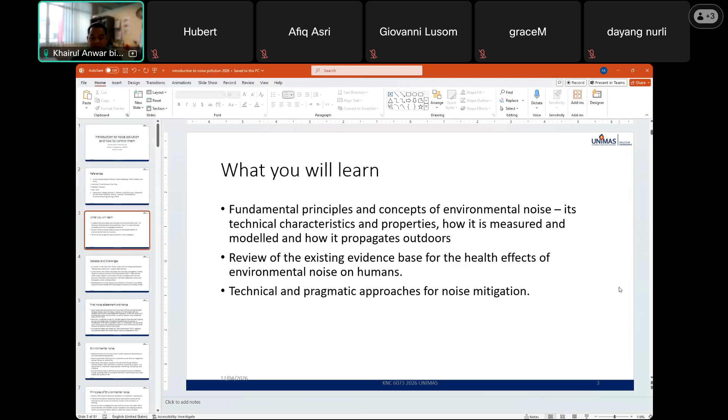So the debate and challenges - this is based on the environmental noise pollution books.

It starts with an article in the New York Times that explains, Behind city's painful din, culprits high and low. The author describes the everyday subjugation of New Yorkers to various sources of environmental noise - we have road traffic noise, then at night construction activities, helicopters, planes, and many more.

So the manifestation of noise exposure as emotion in humans is incredibly subjective, even though the physiological impacts are broadly similar. Later we will see the impact of noise on health.

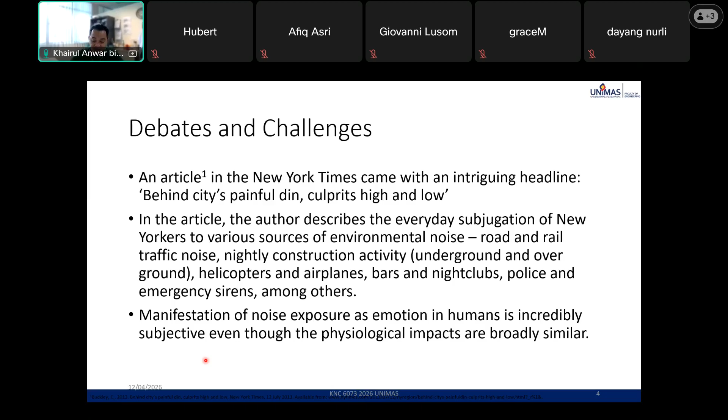Historically, the first noise abatement event carried out was in the streets of Rome during the night, because citizens could not sleep. However, it is the Greeks credited with the first noise abatement ordinance, in the first century before Christ, that banned potters and tinsmiths as well as roosters from residential areas. So this is the first ordinance.

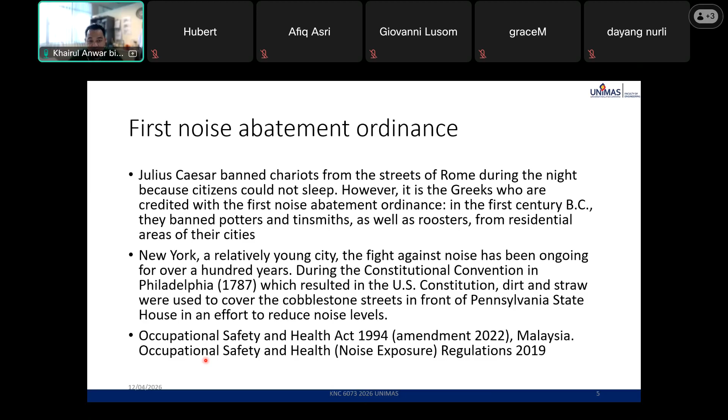Back to New York, a relatively young city - the fight against noise has been ongoing for over 100 years, even during the Constitutional Convention that resulted in the US Constitution, where they put dirt and straw to cover the cobblestone street to reduce the noise level. So in Malaysia, we have the Occupational Safety and Health Act 1994, Amendment 2022, that recently had the Noise Exposure Regulation 2019.

So, environmental noise - the characterization of sound as noise is quite subjective, depending on the individual exposed. Noise is generally referred to as unwanted sound that significantly disrupts human or animal life.

The alternative description is based on physicist George William Kaye's 1931 definition of noise as sound out of place. It is sound that is unwanted, inappropriate, interfering, distracting, and irritating - based on George William's description of noise.

So by definition, environmental noise is a form of pollution, defined as any unwanted sound created by human activities that is considered harmful or detrimental to human health and quality of life. So, principles of environmental noise.

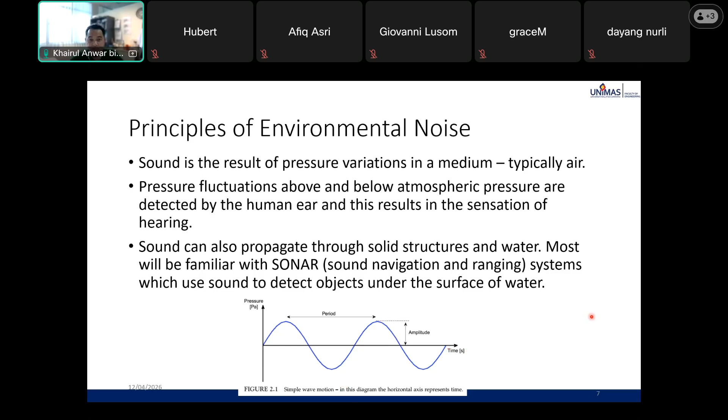So this is the fluctuation of pressure over time, the sound as a wave. So the vertical axis corresponds to the pressure fluctuation, in Pascal, while the horizontal axis represents time. So all sound has three fundamental characteristics: frequency, amplitude, and wavelength. The frequency of a wave, f, is the number of oscillations per second, or cycles per second.

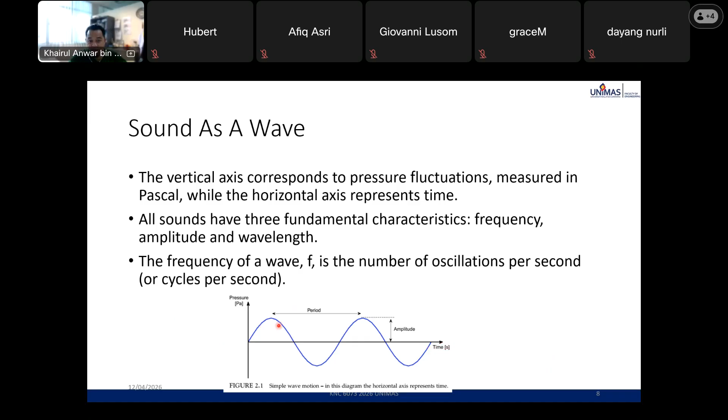Meanwhile, the wavelength lambda is the distance - so you see the difference here, the x-axis now is in distance, length, the distance measured in meters traveled by a wave in one oscillation. So if it's over time, you can calculate the time between the peaks - that's the period. If the x-axis is in distance/length, the distance between the peaks is the wavelength.

For sound waves in air, the speed of sound generally lies around 345 meters per second.

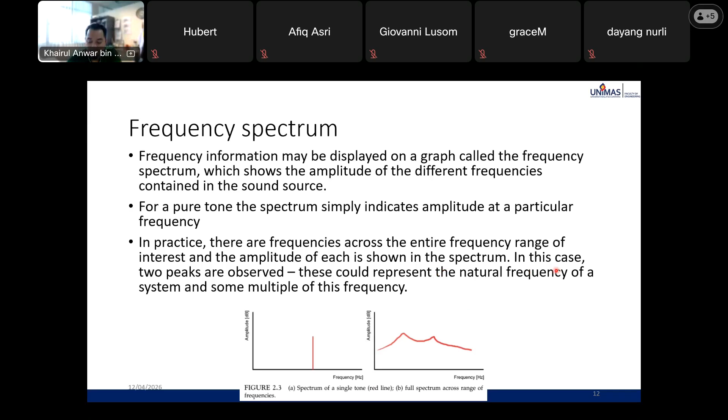So we have octave bands. Certain situations require analysis of the frequency content of noise instead of the overall noise level. This requires information expressed across the frequency range. So octave bands are used to group together different frequencies in a sound, so the frequency information can be analyzed easily. The octave normally has a center frequency.

If you can see here, it's a trend: 63, 125, 250.

So when dealing with octave bands, we identify each by center frequency. So this is the octave band, based on the frequency. Because in frequency, there's a peak, so we choose the center frequency.

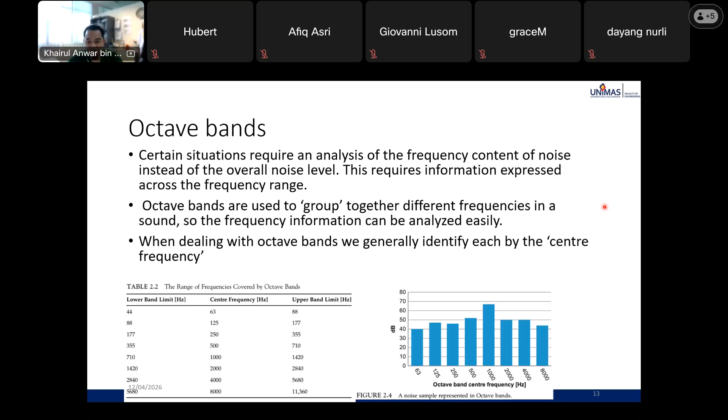Next is the decibel scale. Sound is commonly measured using the decibel scale, or dB. The decibel is a ratio of one pressure to another. It uses a logarithmic scale, and thus reduces a large range of information down into something more manageable.

So LP equal to 10 log P over P naught, squared, in dB. P is the sound pressure being measured, and P naught is the reference sound pressure in micropascals. The reference sound pressure corresponds to the lowest sound pressure that the average person can detect.

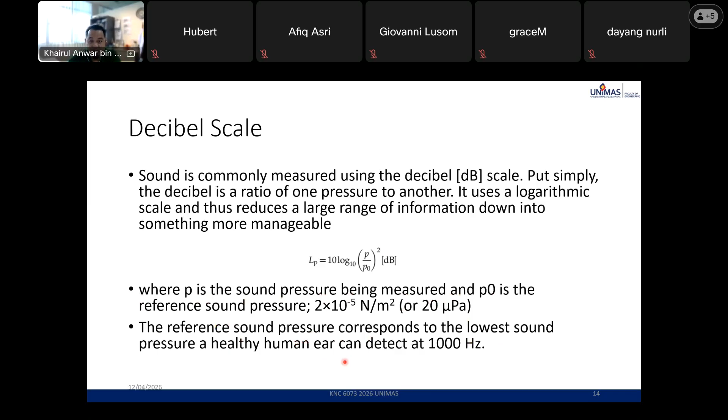So we have a logarithmic scale, because the decibel is a logarithmic scale, it's useful to summarize some movements. Simple, this is just basic, just to show that if it's log10(a) plus log10(b), we can simplify it to equal log10(a multiplied with b). If it's minus, it's log10(a over b). If you raise a logarithm to a power, you can bring the power in front: log10(a) to the power of n equals n multiplied with log10(a).

Just some scale functions. Okay, this is about the sound.

The sound pressure level LP, we have sound pressure level, and sound intensity level LI. The sound pressure level LP is the level of sound expressed in decibels relative to the threshold of hearing.

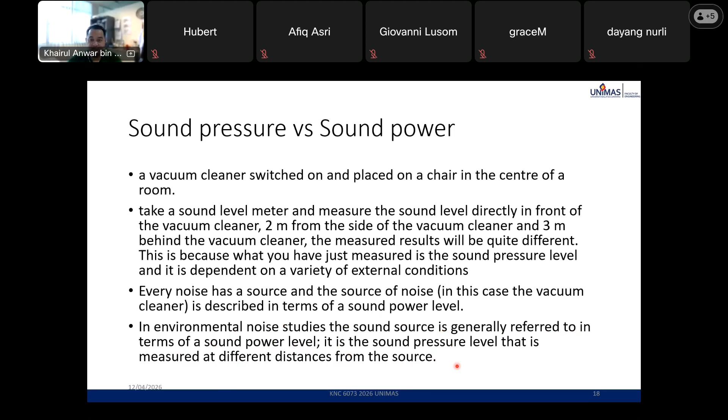Working with decibels, because the decibel is on a logarithmic scale, decibel levels cannot be added or subtracted in the normal arithmetic fashion. Decibels must be added logarithmically. That's why I show you the logarithmic scale.

So two sound levels, L1 and L2, are added together in the following way to get a total sound level: L total equal to 10 log 10 of the bracket 10 to the power of L1 over 10 plus 10 to the power of L2 over 10. This is the example of why we cannot add it normally.

A sound level meter measures the sound level 1 meter away from an idling lawnmower and records the noise level as 60 decibels. Now a second lawnmower with the exact same sound power as the first is turned on beside the sound level meter, again at 1 meter away. What sound level would the meter now record? It is reasonable to assume the sound level meter is subjected to two noise sources, both resulting in 60 decibels at that position. If we were to sum it normally, it should be 120.

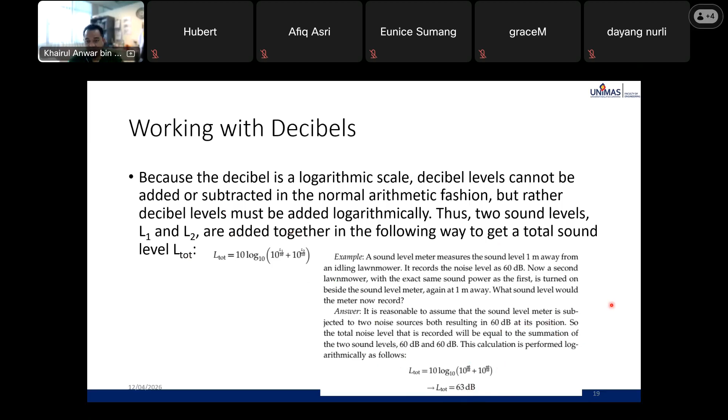But if you follow this logarithmic method, the increase in decibel is around 63. So each lawnmower contributes 60 decibels, but if you add it up properly, it's 63 decibels.

So this is the A weighting, the units. The human ear does not respond equally to sound at different frequencies. We tend to perceive sound at lower frequencies as having a lower intensity.

This is an explanation about the decibel, dB. Normally it should be associated with this A weighting curve because of that first point. So the unit turns to dBA for A weighting, dBC for the C weighting, and dB for no weighting. So dB alone, referred to as dBZ, is no weighting.

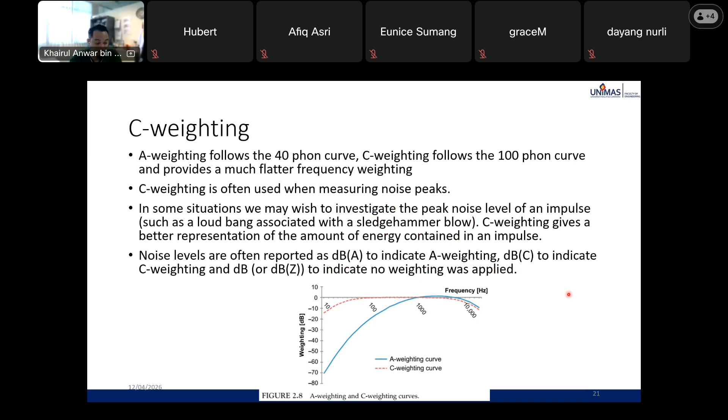Noise levels are often reported as dBA. You also get dBC, the C weighting, or dB where no weighting was applied. This is a noise metric, this is how we quantify noise.

A noise indicator or metric is used to reduce a large volume of information about a noise situation to a single number system. It is designed to make the information easy to handle, but still provide accurate information about the noise environment.

There are three broad categories of time-varying noise. We have continuous noise that is fairly constant over time, such as the operation of an air conditioning unit.

We have intermittent noise, usually at irregular intervals, like intermittent use of a saw in a timber plant or stop-start of a forklift.

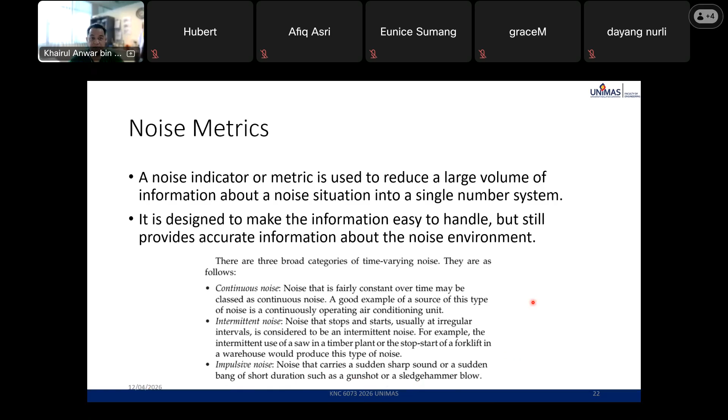Continuous equivalent noise level, this is the first noise metric. How do we quantify the noise? It is an energy-based indicator as it represents the total amount of acoustic energy over the specified time period. It is the continuous steady sound level that would have the same total acoustic energy as the fluctuating noise measured over the same period of time.

So L equivalent equals 10 log of 1 over T, with an integration from 0 to T of p(t) over p0 squared dt.

Here T refers to time, where T is the time period over which measurement occurs. P(t) is the instantaneous acoustic pressure, and P0 is the reference sound level, which has a value of 20 micropascals. That value is constant.

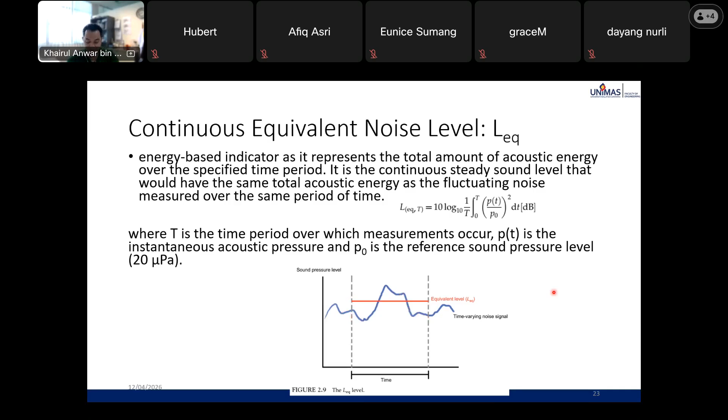L10 represents the noise level exceeded for 10% of the time. L90 represents the noise level exceeded for 90% of the time, and L90 is a term used to describe the background noise level.

For example, an L10 1-hour level of 65 decibels means that for 10% of that hour, the noise level exceeded 65 decibels. 1 hour is 60 minutes. Let's say this is 1 hour, which is 3,600 seconds. So the 10% here equals 6 minutes, or 360 seconds.

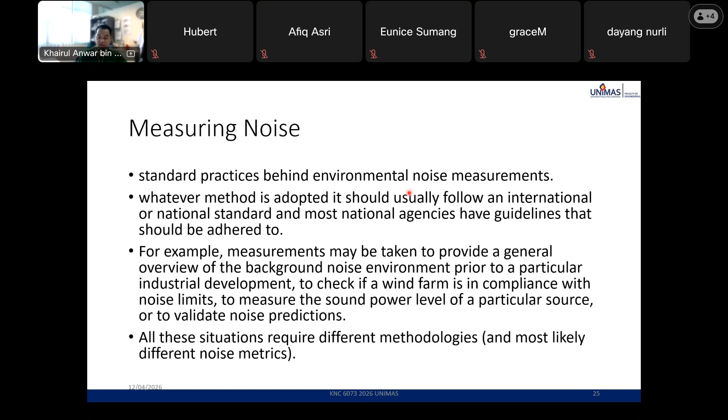To check if a wind farm is in compliance with noise limits, to measure the sound power level of a particular source, or to validate noise prediction. All these situations require different methodologies and most likely different noise metrics.

First one, a competent person. In general, a competent person should have a good understanding of acoustics and standard measurement practice, ability to interpret results, and identify anomalies in results that warrant further investigation.

Another one is the sound level meter and calibration. The sound level meter is an instrument that records the level of sound as well as performing additional analysis on the sound to represent usable information to the operator. All sound level meters must be subjected to regular calibration. To calibrate the sound level meter means to check its response against a known sound source.

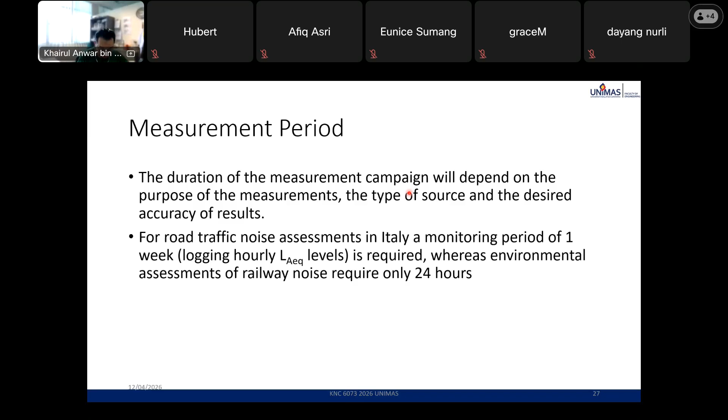The microphone and the sound level meter should be positioned at least 3 meters away from the hard surface to minimize the effect of reflection.

So ISO 1996-2 suggests flush mounting the microphone on the reflective surface, the backing board method. In this case, a correction of negative 6 dB is applied to represent the incident sound free field to eliminate the impact of reflection. So based on this ISO, we put the reflective surface intentionally to the correction.

Then we have extraneous and residual noise. Extraneous sources may be present and encountered, for example, from birds or insects. The residual noise is the sound remaining at a given position in a given situation when the specific sound sources are suppressed, based on the same ISO.

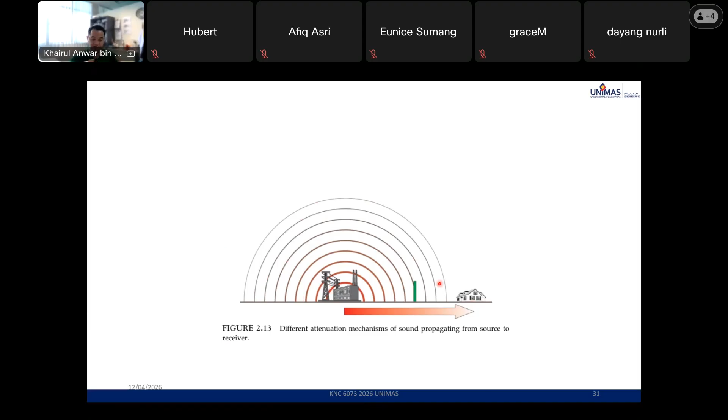Just how the sound propagates, it spreads. Although this is 2D, if it's 3D, it's like a half sphere. The first one is A divergence.

As sound propagates away from the source, its energy is conserved, but it must be spread out over a wider area. In the case of a simple point source propagating noise equal in all directions, the energy of the source is spread out over a sphere with surface area 4 pi r squared.

The attenuation due to this geometric divergence, A divergence, is depicted from this equation: A divergence equal to 10 log 10 of 4 pi r squared. So r refers to distance.

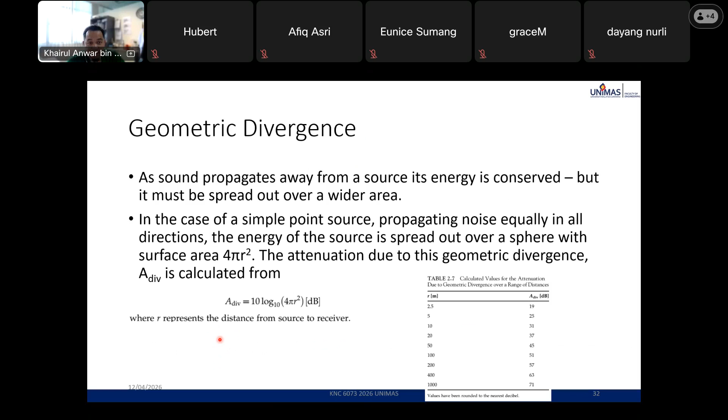A atmospheric equal to alpha times D, where D is the distance over 1000, giving dB. So D here refers to kilometers, but for geometric divergence, R is in meters. So table 2.8 gives values of alpha for temperature 15 degrees C, humidity of 70%, and 1 standard atmosphere.

This is one of the tables in ISO 9613-1, for temperature 15, humidity 70%. So alpha in dB per kilometer, based on this, you can see the values.

And we have ground effect. The attenuation due to ground effect mostly depends on the nature of the ground over which propagation occurs, whether it is acoustically absorbent or not, and the prevailing atmospheric conditions, which may cause curvature in the propagating sound.

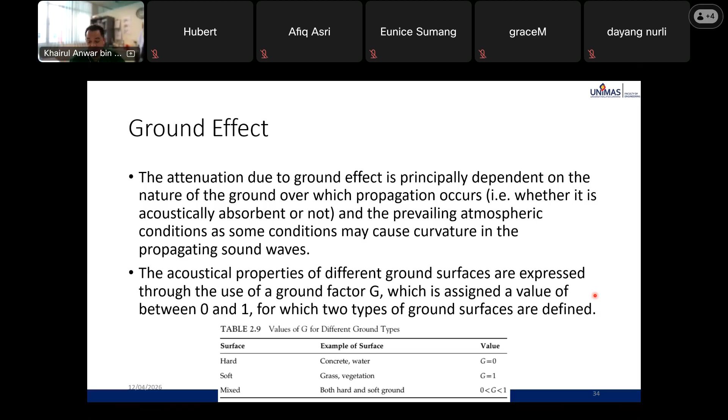So what does it mean? There are many factors that contribute to the value of G, but whatever the condition, the value of G is between 0 to 1.

One of the most common measures for reducing noise is through the use of a noise barrier. Properly designed barrier will reduce noise propagating from source to receiver through diffraction over the top of the barrier or around its edges.

Some noise may also be transmitted through the barrier. An important parameter of diffraction is the path length difference, delta. Path length difference is the difference in length between the diffracted path of the source over the top of the barrier to the receiver and the direct path from the source to receiver as if the barrier was not present.

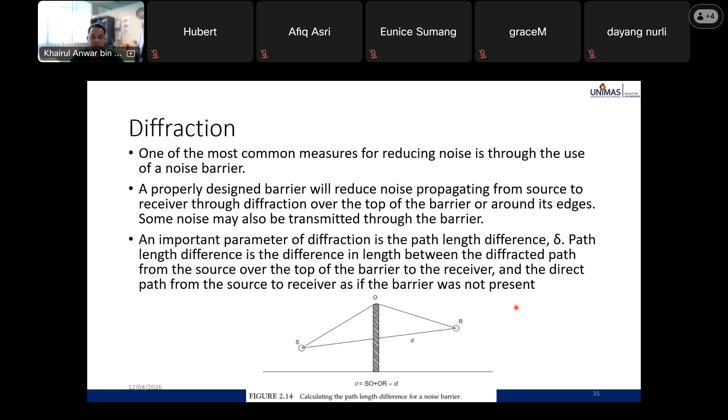So for the diffraction, most calculation methods will provide a very detailed methodology for calculating the attenuation due to a barrier. For any detailed analysis, readers should always refer to the stated procedure. A simplified version is represented here, which assumes no sound propagation through the barrier or around the barrier edges.

If the barrier is infinitely long, the attenuation due to the barrier may then be calculated from a diffraction equation: 10 log 10 of 3 plus 40 times the path length difference divided by lambda, which is the wavelength of sound.

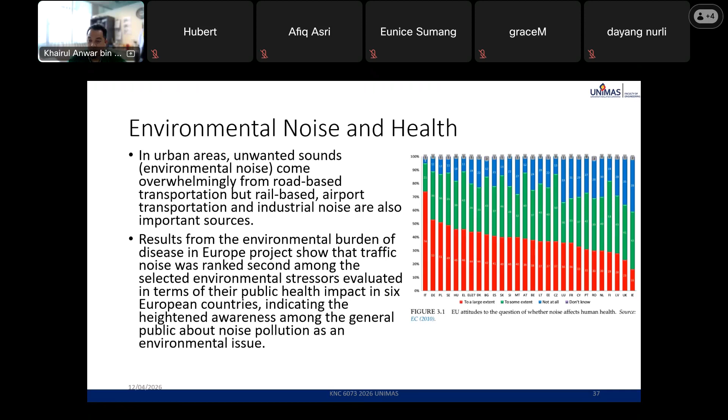This is the impact of noise to health. So traffic noise is the stressor. Table 3.1, burden of disease from environmental noise in Europe.

Chapter 3. Table 3.1 shows a summary of the results from the WHO 2011 burden of disease from environmental noise study, the result of the first comprehensive effort at identifying the impact of excessive environmental noise on public health.

The study concluded that 1 in 3 individuals in Europe is annoyed during the daytime, and 1 in 5 has disturbed sleep at night purely from traffic noise alone.

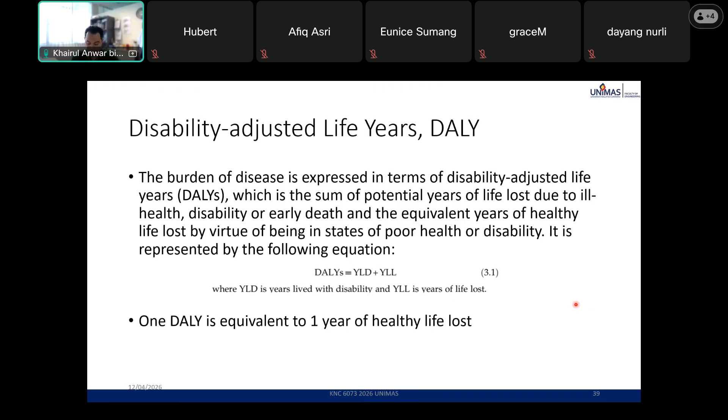But the WHO 2011, what is the burden? It's a methodology consisting of calculating the burden of disease on the basis of exposure-response relationship, exposure distribution, population attributable fraction, background prevalence of disease, and disability weight of the outcome.

Attributable fraction is the proportion of disease that is estimated to be ascribed to exposure. The disability weight factor is used to reflect the severity of disease on a scale of 0 to 1.

Okay, I refer to book page 53, 54. So there's a graphic representation that we can refer to.

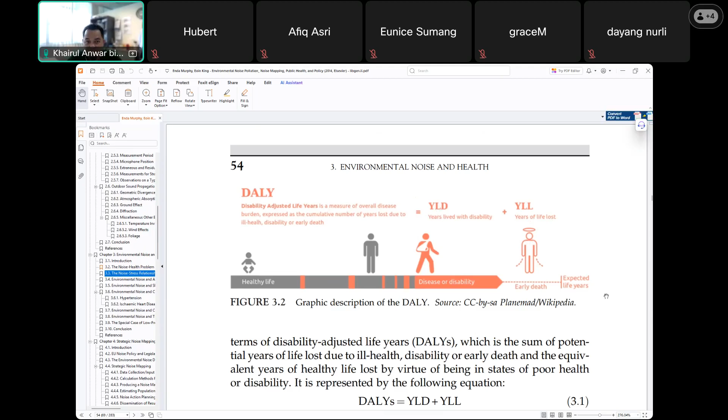So the DALY was really developed by Harvard University for the World Bank, first used as input to the World Bank World Development Report 1993, Investing in Health. Since then, it has been adopted by the WHO as a core metric for measuring the burden of disease in populations throughout the world.

However, the metric has not been without its critics, with Anand and Hanson describing its flaws and its assumptions and value judgments as open to serious question. I think it's perfect.

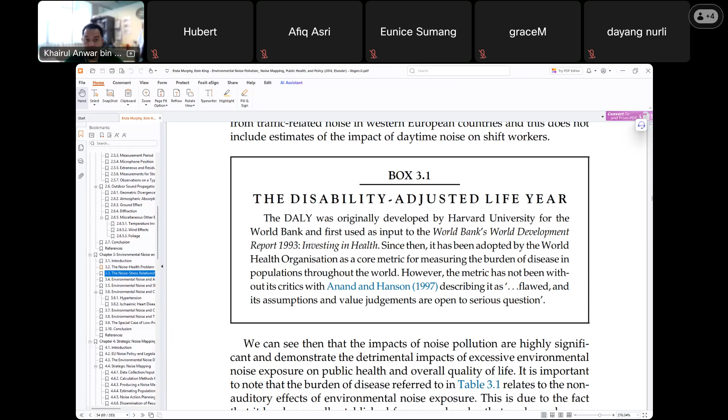Good question. Yeah, noise activates the sympathetic and endocrine system. This is more technical: the endocrine system, the pituitary adrenal cortical axis, and the sympathetic adrenal medullary axis.

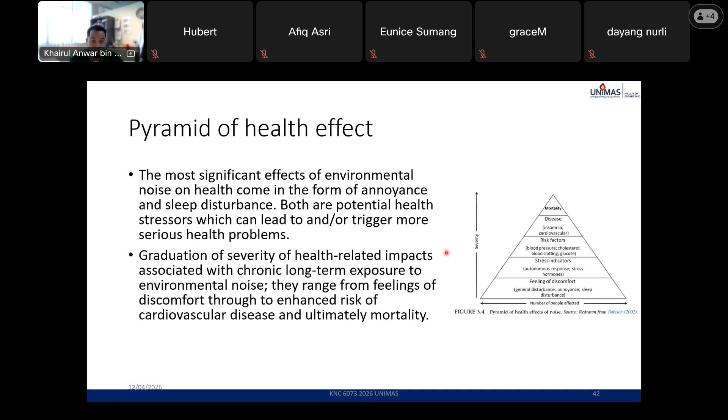Environmental noise and cardiovascular disease. If you refer to this book, there are many challenges starting on page 57: we have environmental noise and annoyance.

Then sleep disturbance, cardiovascular hypertension, heart disease.

So it's well known—this is based on page 66—that short-term exposure to environmental noise is a stressor that activates the sympathetic and endocrine system. This may lead to acute changes in blood pressure and heart rate, as well as elevated levels of stress hormones in the body.

Over the last two decades, a series of studies have produced results which suggest transportation noise is associated with negative cardiovascular effects, including hypertension and exposure to noise near airports.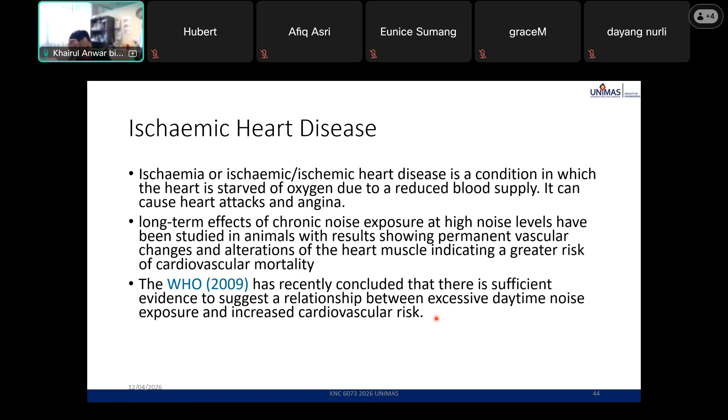So we need to mitigate the noise. A human that suffers from prolonged exposure above 40 decibels for a lifetime exhibits a range of detrimental health effects.

Noise action planning under the EU Environmental Noise Directive (END), based on Chapter 7, is the world's largest and most ambitious program of strategic noise reduction according to END. The action plan refers to a plan designed to manage noise issues and effects.

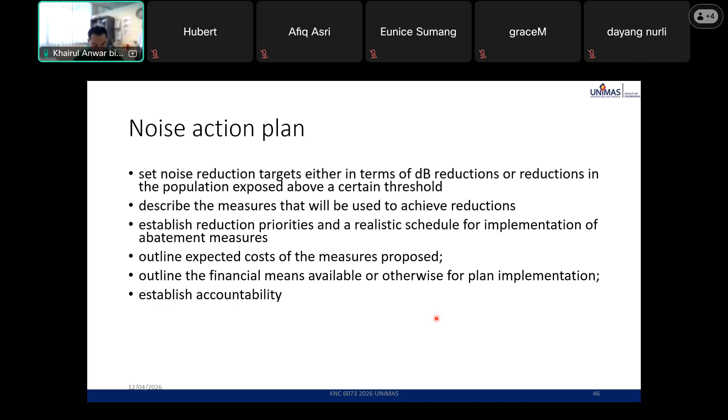So this action plan is based on the END. Refer to this book, page 204, for the steps for noise action planning.

You can refer to the chart as well - figure 7.1, overview of the planning process. First is establish responsibility, meaning assigning roles to individuals and agencies.

Step 2: identifying existing noise limit values at the national, regional, and local level in individual nations or states. Step 3: hotspots are areas where the level of noise is very high, or the level of population exposure to noise exceeds predefined national limits.

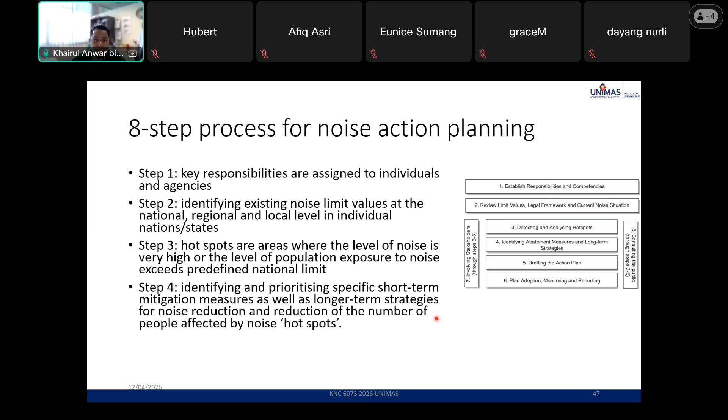Step 4: identifying and prioritizing specific short-term mitigation measures as well as long-term strategies for noise reduction and reduction of the number of people affected by noise hotspots. Step 5: draft action plan.

This should provide a summary of the noise problem in the area under consideration, as well as an outline of measures that will be put in place to address noise pollution.

Step 6: adopting, monitoring, and reporting of the action plan. Step 7: selecting and actively involving relevant stakeholders in a meaningful manner. Step 8: consulting the general public. Source abatement.

For each of the steps, the book will provide you with more explanation, such as what is meant by general public health in Step 8.

Consulting the general public - it is crucial that the general public are consulted in a meaningful way, because the noise action plan relies heavily on general public acceptance and support for noise abatement measures. After all, those who have to live with the noise abatement plan are the general public.

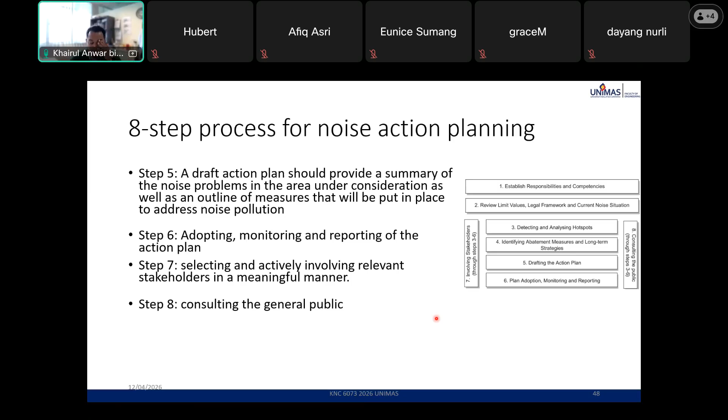Yes, so abatement - the most effective noise control and regulation measures are those that target reduction in noise emitted at the source. For a noise control strategy to be truly effective, it must, given the duration of specific cases of exposure, attempt to utilize abatement measures that target noise reduction at the source as well as at the receiver.

The most effective, cost-efficient method of reducing noise at the source is via legislation or regulation, which sets up a permissible noise level at the point of manufacture. This involves policy, and enforcement of the limit is crucial to the effectiveness of any legislation.

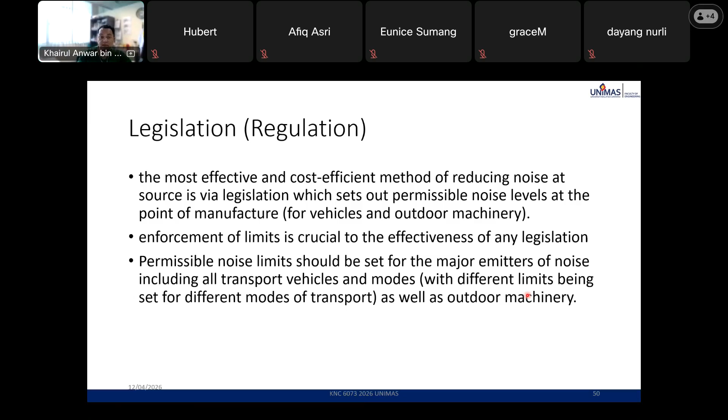Next is low noise road, rail surfaces and maintenance. As mentioned in chapter 5, the main sources of road noise are engine noise and rolling noise. The latter relates to the interaction between the vehicle tire and the road surface which generates noise, while the former relates to vehicle engine and transmission noise which propagates from the vehicle directly, and also reflected noise from the road surface.

The three main characteristics which describe the acoustic behavior of the road surface are surface roughness, porosity, and elasticity. They are responsible for air pumping, influencing the excitation of tire vibration and sound radiation from the tire.

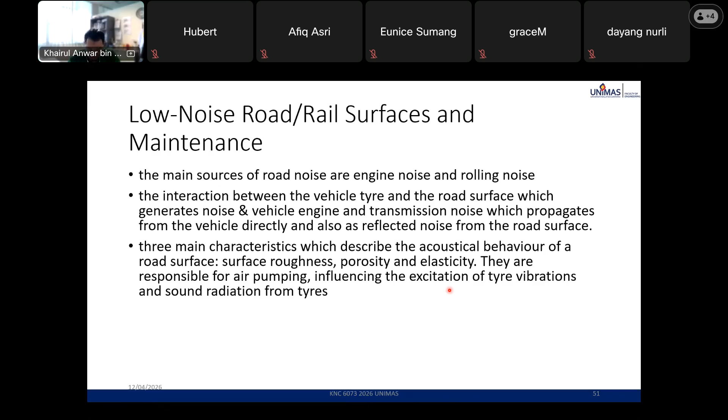Low noise road surface: the ability of a surface to attenuate noise depends on a number of factors, but key factors are the type of the surface, the texture pattern, and the degree of porosity of the surface structure. The most effective low noise road surfaces currently available are porous asphalt and thin layer asphalt, while there are a number of next generation surfaces currently showing some additional noise reduction potential.

Porous asphalt and thin layer asphalt. The porous asphalt reduces the air pumping effect and reduces the noise reflected from the vehicle.

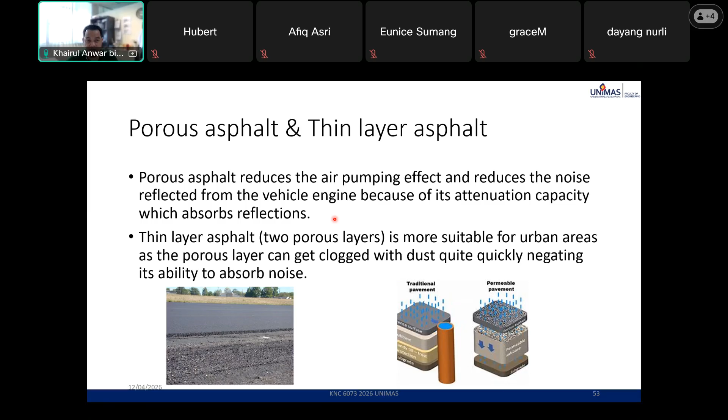What is the input? Because of its attenuation capacity, which absorbs reflection. Another one is the thin layer asphalt. The thin layer asphalt is more suitable for urban areas, as the porous layer can get clogged with dust quite quickly, negating the ability to absorb noise.

So for both surfaces, the noise reduction effect is based on the lower aggregate size with 20 to 25% voids in the width of the mixture, which has a greater attenuation capacity for noise absorption. As a result, the surface absorbs noise and rainwater, thus less water spray is experienced by road users and overall noise is reduced.

The single layer porous pavement has an average noise reduction of 3 to 4 decibels on highways in relation to dense asphalt concrete. Two-layer porous pavement has a noise reduction potential of around 4 decibels or more.

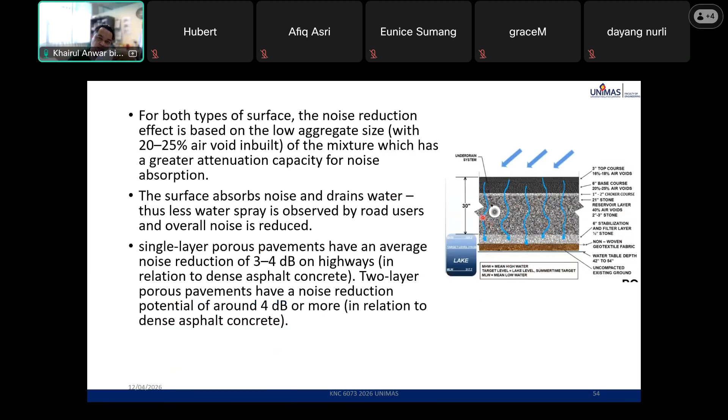So this is the porous asphalt. The water can be absorbed into the pavement, but it is subject to clogging, easily clogged.

The low noise asphalt has an additional advantage over other mitigation approaches such as facade insulation, in that the indoor and outdoor noise affecting buildings near treated roads is reduced.

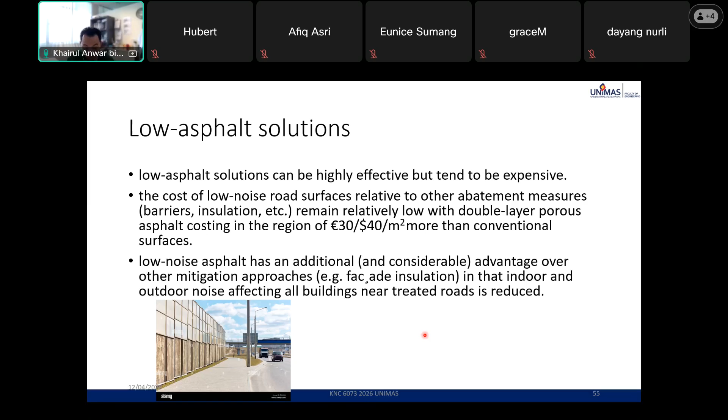In 2009, the Dutch Center for Transport and Navigation, along with the Danish Road Institute, conducted a joint research project assessing the performance of available low-noise road surface types. The goal was to identify pavement with the potential to reduce rolling noise by 10 dB with respect to the Dutch reference road surface. The project identified a poroelastic road surface produced by Yokohama and Nippon in Japan.

Overall, the project concluded none of the available ready-to-use commercial products are capable of providing the desired 10 dB noise reduction, because the goal for this was to reduce 10 dB based on the reference road surface. In order to attain such reduction, a new surface with more porosity and/or a wearing course with an elastic skeleton needs to be developed.

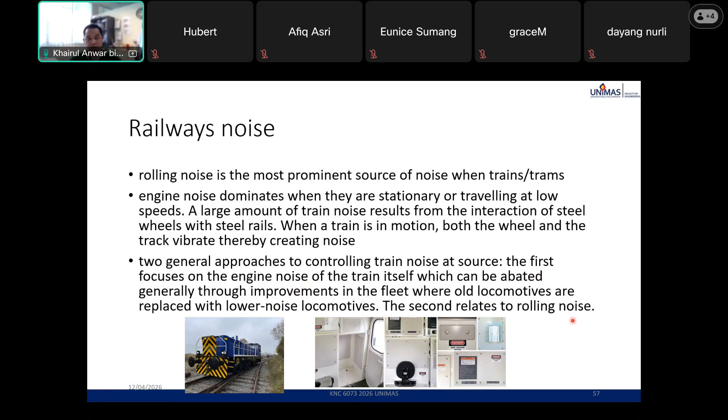There are general approaches to controlling noise at its source. The first focuses on engine noise of the train itself, which can be abated through improvement in the fleet, where old locomotives are replaced with low noise locomotives. The second relates to rolling noise.

For rolling noise, track and wheel irregularities can raise noise emission levels by anywhere between 10 and 20 decibels compared to a reference condition. Defects in the wheel thread, loss of portions of the wheel thread due to from mechanical or thermal fatigue, and rail and wheel absorbers, reduce rolling squealing noise, which can lead to a 2 to 3 decibel reduction in noise.

Acoustic grinding is applied to rail tracks to reduce friction. The objective of rail grinding is to maintain and extend the service life of the rail. The process involves applying abrasive grinding stone to the surface of the rail to quickly remove corrugations, burrs, and other defects. This can reduce noise by up to 3 decibels.

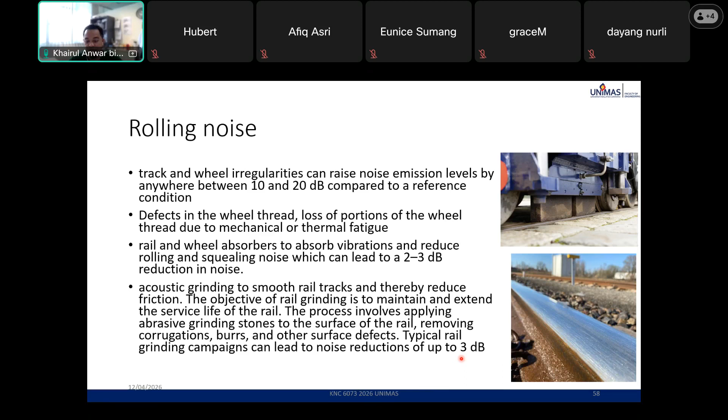The damper reduces the amplitude of vibration along the rail, thereby reducing the noise radiated, which can reduce noise by up to 6 decibels.

Another way is to improve brake technology. New composite brake block technology, including the K and LL blocks, compared to cast iron brake blocks, has the ability to reduce noise emission by 8 to 10 dB. This type of noise abatement measure involves retrofitting the fleet, or a portion of the fleet, with the new brake block technology. A shroud or wheel cover for the train can also reduce noise by up to 3 decibels.

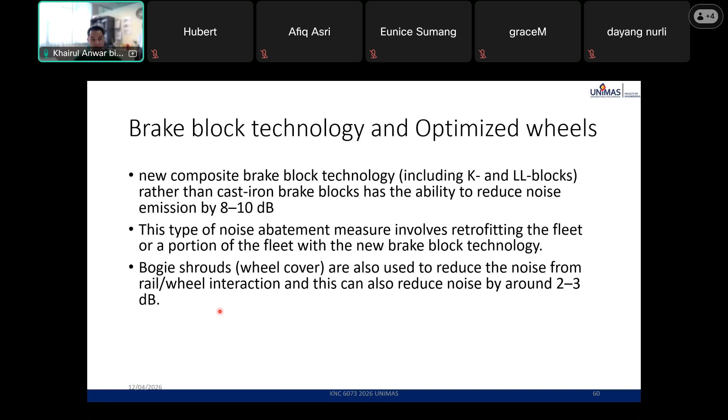Noise emission from a modern tram is at least 10 dB less than an older tram, assuming a 30-year lifespan.

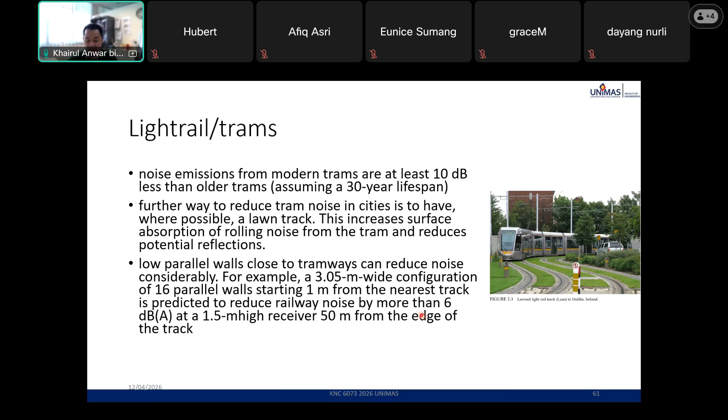Some of the effort involves using low noise tires. A study found a range of somewhere between 6 to 8 dB within certain tire subcategories, and 10 dB within the entire car category, based on differences in acoustic performance across 700 tires.

Utilizing the best tire technology could be fast tracked into vehicles through the introduction of legislation, enforcing policy to reduce the permissible noise limit. In Europe, noise rating provides external noise assurance for tires in the same document.

Then, beyond deciding on low noise tires, we have traffic management.

The most important measures are reduction in traffic volume, particularly the volume of heavy vehicles, and reduction in traffic speed. If traffic volumes are reduced in a city, it is vitally important that average speeds are not allowed to increase elsewhere. Very often, noise reduction achieved in cities is offset by increasing traffic speed beyond, because vehicles can travel faster on less busy roads. In 2011, a study found that banning private cars in the city center reduced noise level by only 2 dBA, because buses increased their speed due to less congestion.

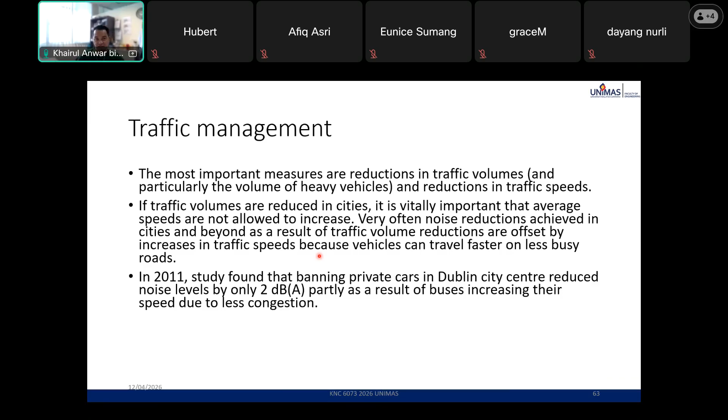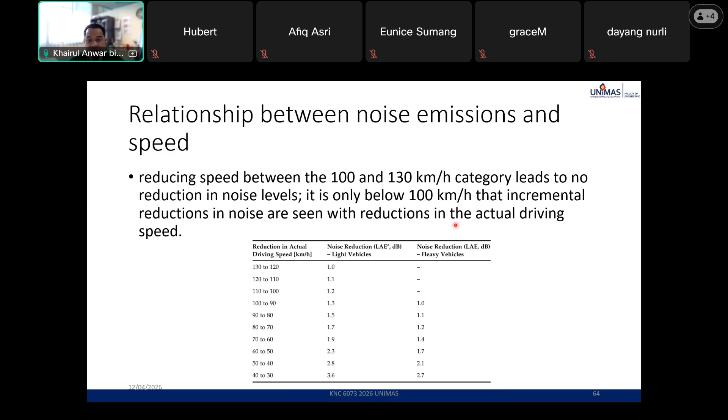Reducing speed between 100 and 130 kilometers per hour leads to almost no reduction in noise for heavy vehicles, and only one decibel for cars. It's only below 100 km/h that you can measure a significant reduction in noise from actual driving speed.

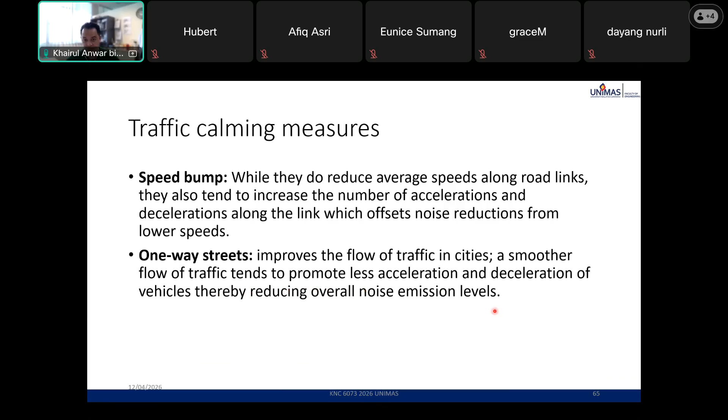Traffic calming measures, such as speed bumps, do reduce average speed along a road link, but tend to increase the number of accelerations and decelerations along the link, which offsets the reduction. Another way is a one-way street, which improves the flow of traffic in cities. This results in less acceleration and deceleration, which reduces noise emission.

Another alternative is nighttime traffic restriction. 27% of the population was exposed to LDEN, a noise metric. LDEN refers to day, evening, and night.

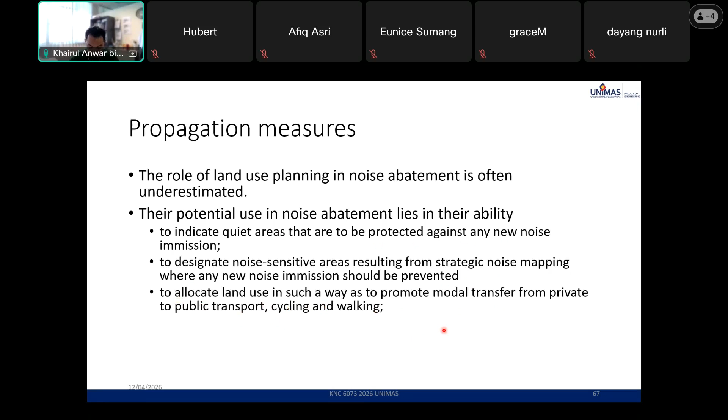First, through noise compatible buildings. The use of noise compatible buildings as noise barriers can be achieved through the land use planning and development control process.

Best practice includes utilizing buildings that are not noise sensitive as noise barriers for sensitive buildings. We can see this practice in hospitals or housing areas. Noise abatement can be achieved through the careful extension of existing commercial buildings to act as a barrier to more sensitive buildings. In hospitals, they put parking spots to protect the hospital.

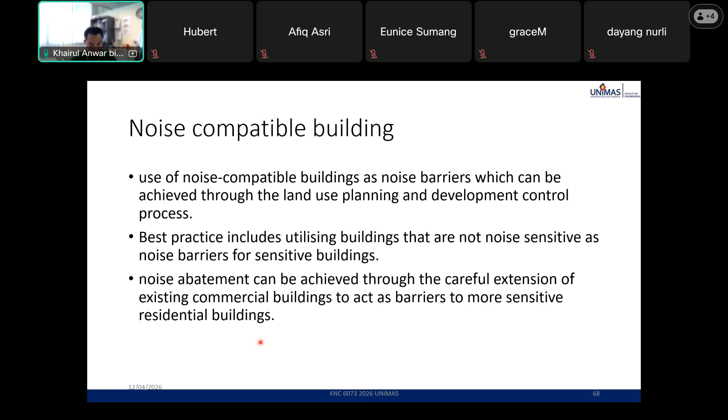The building design. So what about how building design, the specific areas where building design can influence noise emission inside the building, include room layout like this - the noise compatible room layout, and geometry and orientation of the building.

Room layout should ensure that rooms associated with less noise sensitive activities, like kitchen, bathroom, utility, and storage, are placed toward the noise source such as a road or rail line, while rooms that house more noise sensitive activities such as bedrooms for sleeping and living rooms for relaxation are located away from the noise source.

That's why some housing designs put the kitchen near the front door - they apply this design to reduce noise traveling to noise sensitive rooms like the bedroom and living room. This is mostly found in apartment layouts.

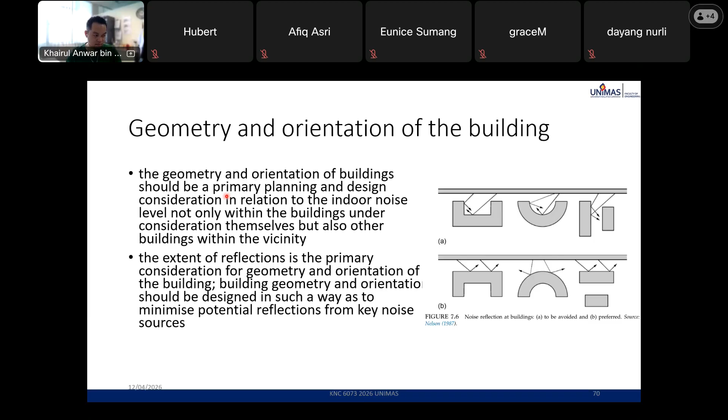Then we have balcony and wing wall measures to mitigate noise propagation. For balconies, orienting windows away from the noise source and protecting them with wing walls is also good acoustic design. The noise reduction from a partition balcony ranges from 5 to 14 dBA, depending on the width of the window.

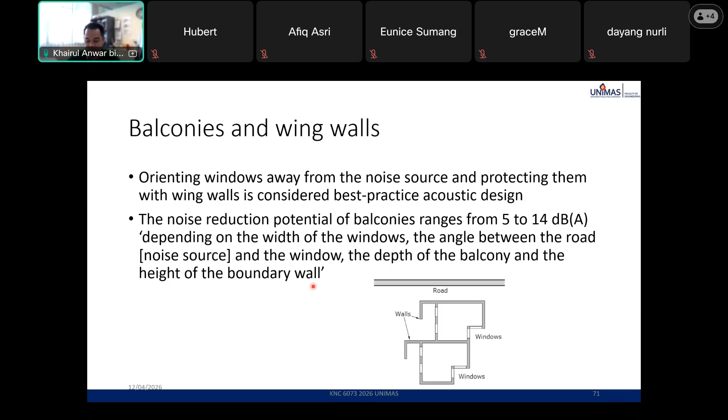Then the noise barrier, normally found along highways in the peninsula. The noise barrier generally seems to be an effective means by which the propagation of noise can be mitigated. Highways, railway stations, railway tracks, or LRT that pass through residential areas - you'll notice they slow down a bit, or they put up a barrier where possible. These seem to be effective means by which the propagation of noise can be mitigated.

The first purpose-built noise barrier was built in California in 1968. It's frequently used to reduce noise propagation alongside roads or railway lines. In fact, noise barriers including earth berms are the dominant type of mitigation measure in Conference of European Directors of Roads member states to reduce road traffic.

So earth berm, like a sloped earth mound. An example is shown in figure 7.28, page 228.

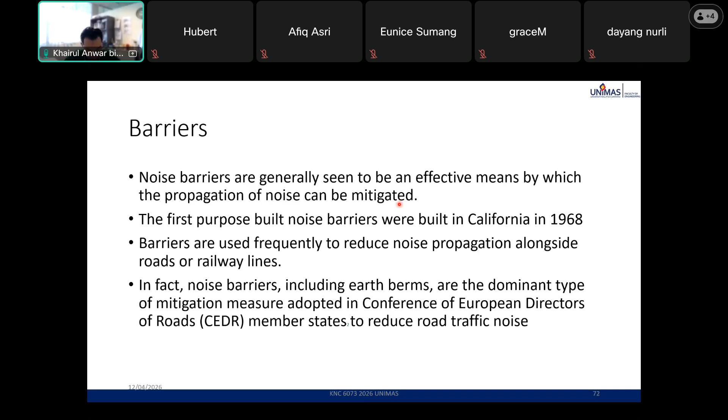Based on ISO 9613, the maximum attenuation is limited to 20 dB in any octave band for thin noise barriers, and 25 dB for thick noise barriers. However, in practice, the noise barrier will reduce noise levels by 3 to 7 decibels, depending on their design and height.

Barriers are relatively ineffective at screening properties at some distance from the road, as the barrier's attenuation is not additional to the attenuation due to propagation over the intermediate ground, instead of being an additional component of noise attenuation.

Road noise barrier. A simple reflecting barrier is often used along roads and rail lines, but modern barriers tend to have absorptive surfaces on the traffic side, which minimize the level of reflected sound.

It can be made of any material: acrylic, wood, concrete, rubber mat. In CEDR member states, concrete, wood, and aluminum are the most prevalent barrier types.

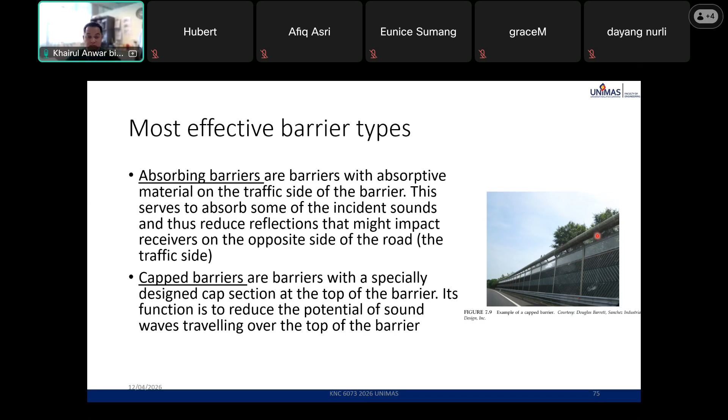Then we have the embankment or earth berm. These are natural barriers that can be created from material dumped during the construction phase of a new building. Vegetation can also be used as a noise barrier, however its effectiveness in terms of noise reduction is minimal.

A 10-meter depth of vegetation results in only a 1 decibel reduction in noise.

So how do you know that? It's referred to as the attenuation under miscellaneous foliage, under outdoor sound propagation. See Table 2.10, page 36. It's based on the foliage and its distance. The highest is about 1 to 2 decibels, but that's specific to the 4000 hertz frequency. Other than that it's around 1 or 0.01 decibel.

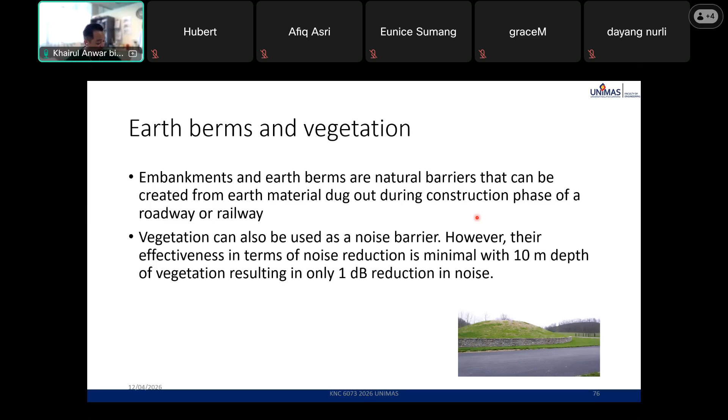Design consideration: the barrier must be sufficiently tall so that it blocks the line of sight between the source and the receiver. Yes, that is correct.

As a rule of thumb, the most effective barriers are solid and continuous. Where a break in the barrier is necessary, the barrier should overlap.

Barrier placement in relation to the noise source is critical. The barrier should contain no leaks due to holes, cracks, gaps, and so on. These leaks will compromise the acoustic effectiveness of the barrier.

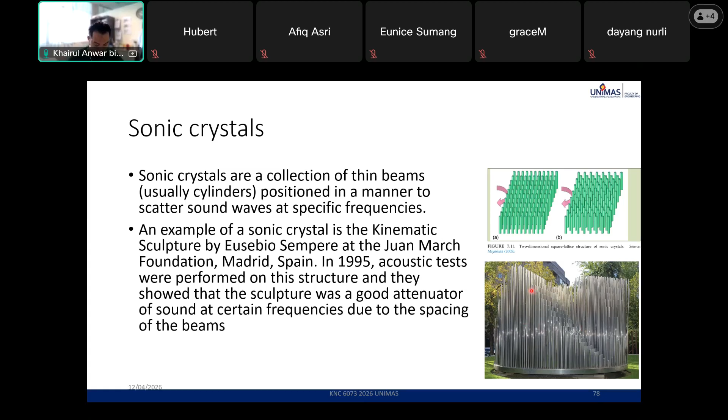Then the building or facade insulation. Sound insulation of buildings includes soundproofing the windows and outer walls, particularly at the facade of the building, which is directly exposed to noise.

Modern windows with double or triple glazing can reduce noise by somewhere in the region of 30 to 40 dB, but for triple glazing, we normally find it in some of the high-end hotels. One example is KLIA and Sama-Sama Hotel.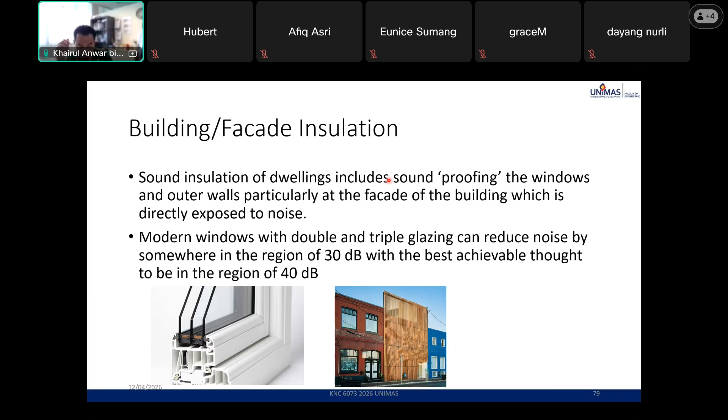The wall insulation: a solid, well-fitting door can achieve noise reduction between 35 to 40 decibels.

Sound isolation can be linked closely to improved thermal insulation. Insulation placed between the vertical members of an external wall will play a significant role in reducing sound transmission through the wall. Thus, the two are compatible, and insulating buildings for energy improvement also has the effect of reducing internal noise levels.

Results from a recent Norwegian study found an average noise reduction inside dwellings of 7 decibels from facade insulation.

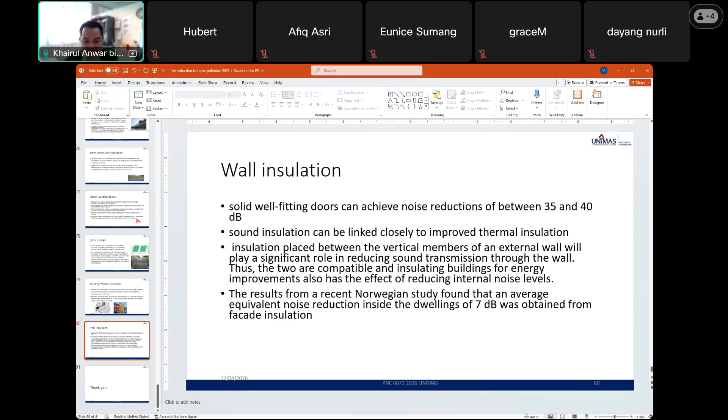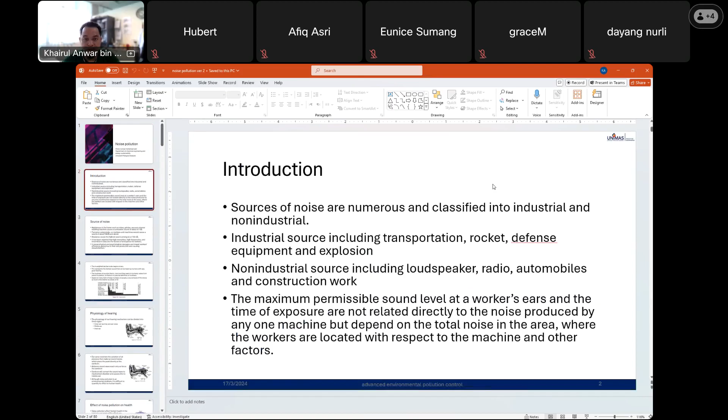Then we have some case studies and calculations.

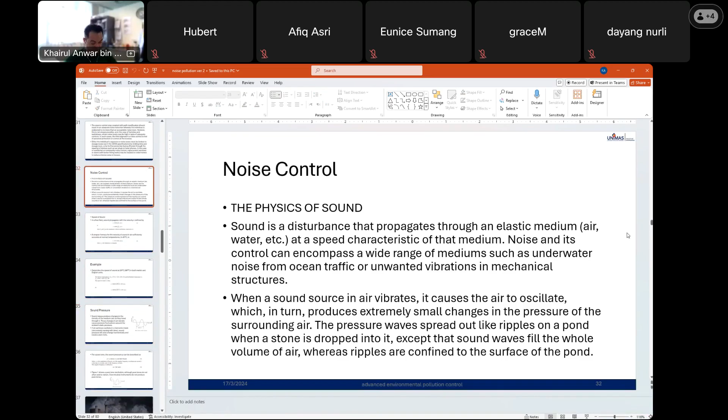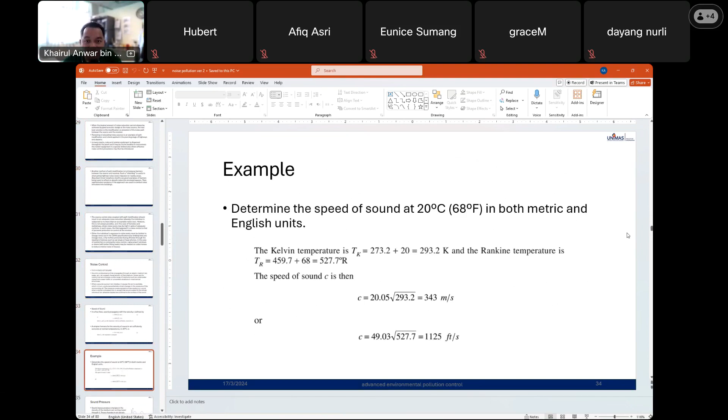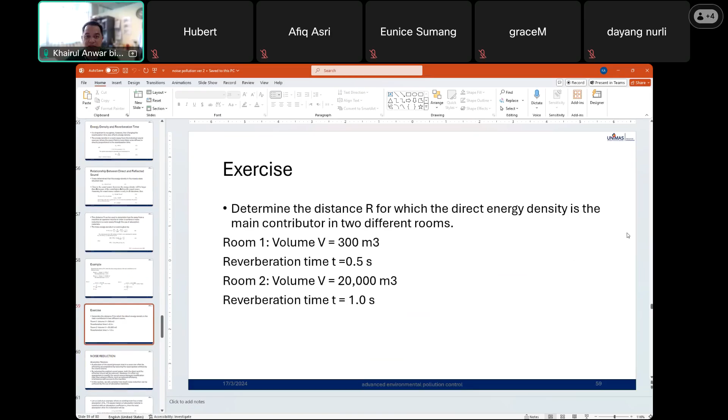So this is some calculation with exercise examples. I think we'll continue next week with some more noise examples and calculations. This is based on the Handbook of Environmental Engineering by Lawrence.